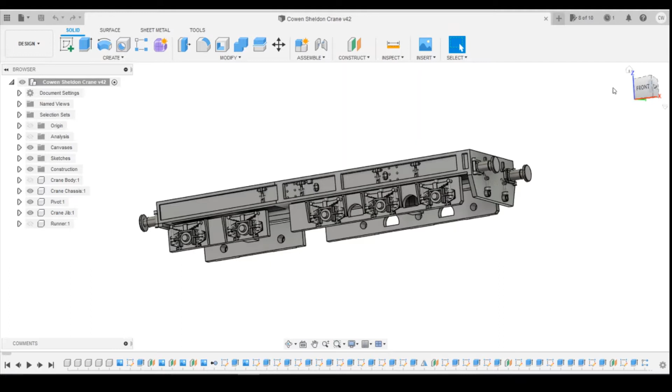Today's lesson I've got the test results from the print test that I produced yesterday. There's two versions. First was the version where we kept this as a rigid frame here, and then the second was printed as a bogey. Bonus points for anybody who spotted the issue with the bogey: the bogey pivot point is exactly where you'd want to have the centre axle.

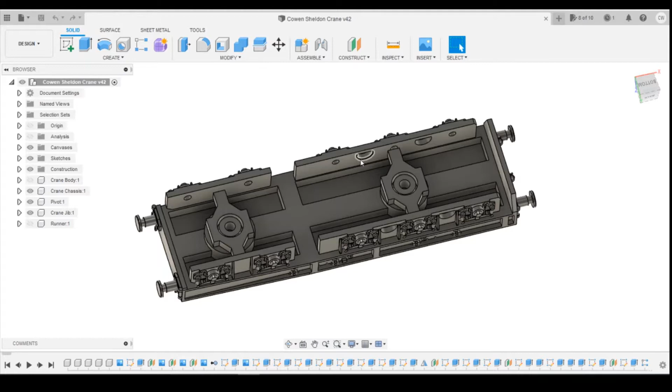Unfortunately, the issue with having that there is obviously you can't then have the axle, and you can't really offset the pivot point because then it just doesn't work. There's not really enough space in here between each of these to have the pivot point. So that was one massive disadvantage with that. And when I did only have the two axles in here to test it, it did run really well.

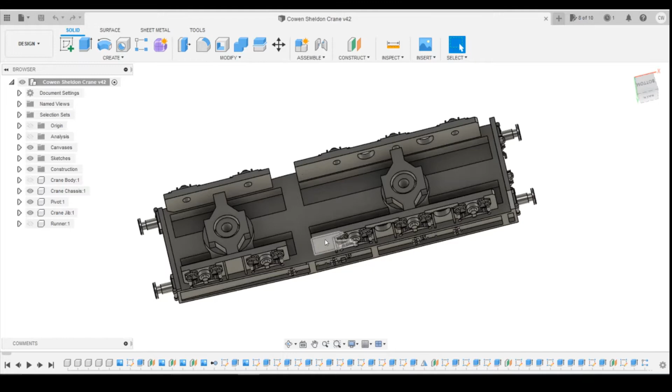The issue really is these ends particularly were a little bit too flexible and bent, so you could get around that by just putting some sort of bar across here to hold that steady. You could probably do the same at the other end to hold that end steady. And it did run well, but only with two axles. So if you wanted to go down the route of using that bogey, it does work.

The other option was we had it as the rigid frame, and with the rigid frame, without the bogey on, it would go around corners absolutely fine. And I ran that all the way down to 9-inch radius corners, and that worked absolutely fine. As soon as you put the bogey on, you wouldn't be able to negotiate the corners, and that was a 10-inch corner and a 9-inch corner and 10.5, I think it was. Above that, it was fine, just about, but it ran better on all of the radiuses that I've got on my layouts without the center axle.

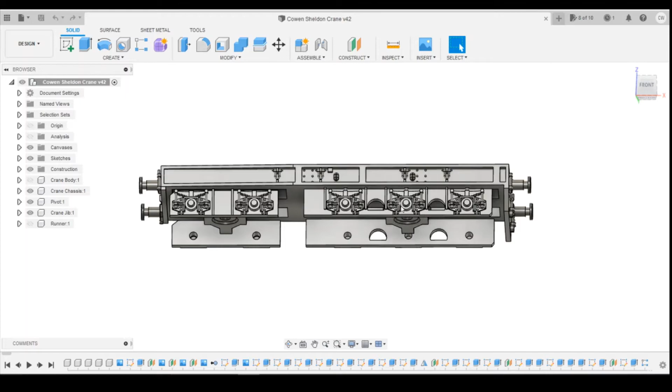Now I found that this ran absolutely fine, all the way down to 9-inch radius corners. There was enough play within the axles and the pivot point on the bogey that it worked absolutely fine. So I'm personally going to go down the route of pursuing it with the rigid frame so that it looks realistic, especially when it's negotiating point work on the layout. You're not going to see another bogey pivoting.

What I am going to do though is I'm going to draw a false wheel in this position here, just so there's something hanging down slightly. It's not going to touch the rail, but just hanging down enough that it looks like there is something there, and I could paint that black, and it will sort of mask the fact that there is that center axle missing. And personally that's the route I'm going to choose.

If you want to go down the bogey route, doing a similar sort of thing, that's your choice. But from the testing, I will say that I just could not get all three axles and the bogey to work on the tighter radius corners. So yeah, it's your choice how you'd want to pursue that from now.

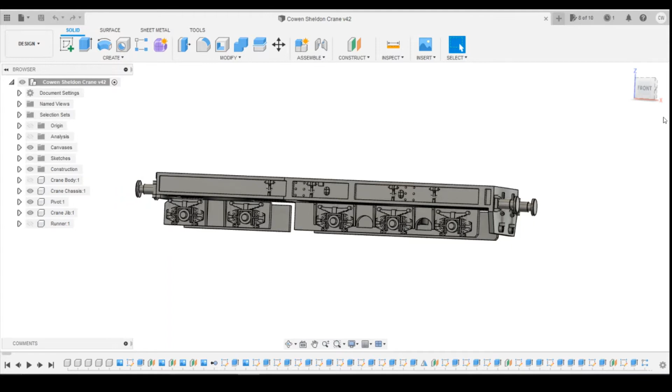Okay, so the other benefit of being able to have this as a rigid frame, and a disadvantage with the bogey, is going to be having the jacking points in here. If you have this front jacking point, you're not going to have enough room to pivot between the edges here and the front of the buffer beam. And you're going to have similar issues where it's going to be starting to clash with the bogey here when it starts to pivot.

So that's the reason why I'm going to pursue really going down this rigid frame. So in today's lesson, really what I'm going to do is I'm going to start by returning this back to the rigid frame setup, so we can then move forward from there, looking to add in on future lessons all that extra detail that I said about the jacking points underneath.

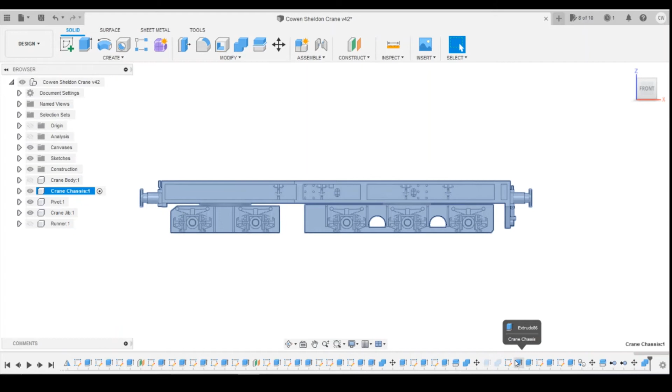Okay, so if we go to the chassis, we've got to make sure that we turn the radio button on, and then it changes all the history down here to match. And what we're going to do is just remove, not necessarily remove, because I'm not going to delete the work in case in future I want to return to this. So all I'm going to do is suppress all these features, and then we can then move forward back to how we were before.

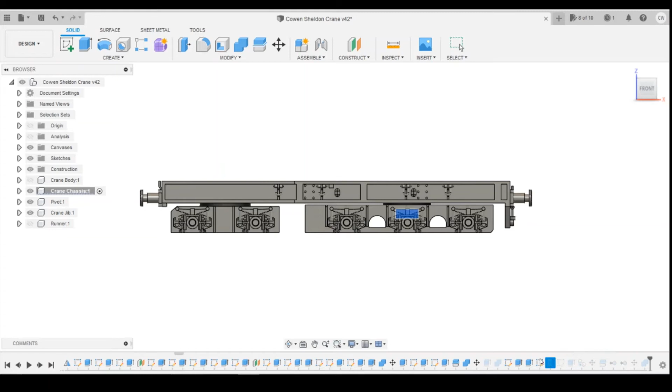And then in future, if you wanted to go back and do work using the bogie, you've got all these details here. It's not like they're lost. You can then just continue from that point. And then these two here, I'm going to unsuppress these, and that should return that back to the rigid frame setup that we had.

Where's that sketch from? Ah, yeah, unsuppress. Yeah, it is those two. Unsuppress those two. Okay, so there we are. We've got back to the rigid frame. It's only a really short lesson to give you the sort of results of the test and returning this back to how it was. So nothing too spectacular.

But hopefully that's now eliminated the need for you to worry about which option you're going to go down. I've given you the pros and cons of each, and the fact that I feel that this is going to be the better option for us to pursue going forwards. It's going to give us the cleaner results and the operation that we require.

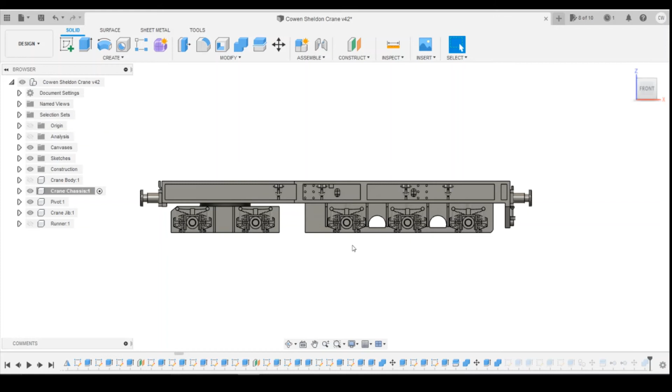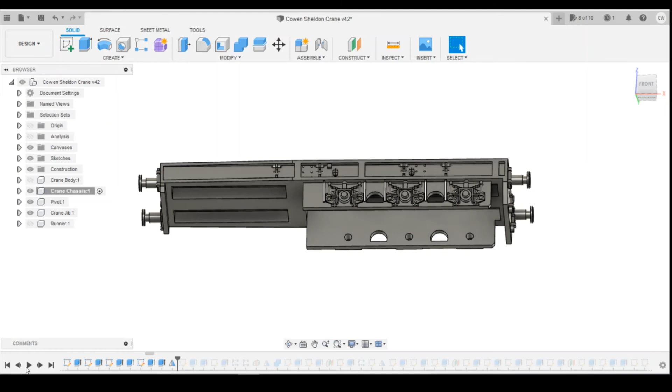As I did say, the one thing I was going to do was add that centre axle in here. So again, I'm going to just go back in the history to before the mirror object of the whole of the chassis. It's that one. So if I roll the history back to here, come back in, I'm going to rotate this round, and then I'm just going to draw on this back surface a wheel that's not going to come down too far.

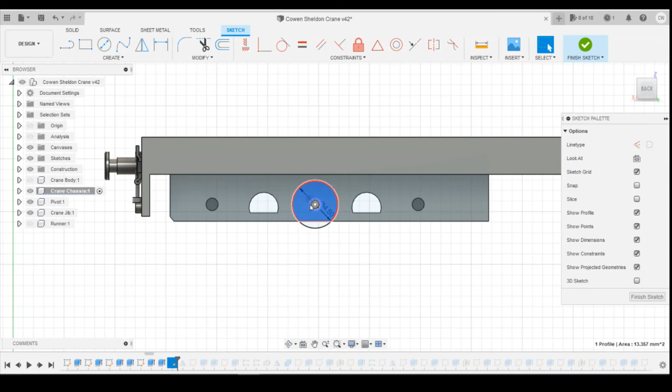So I'm going to use the centre point of the axle, and then you can see I'm just going to go, I don't know, maybe 4.5 millimeters. And if I'm using the 6.1 millimeter axle, you're going to see that you're going to have the hang down below, but it's not going to be touching the wheel. I'm just going to drag this inwards about a millimeter, give it a little bit of strength, tell it to be a join, and click on OK.

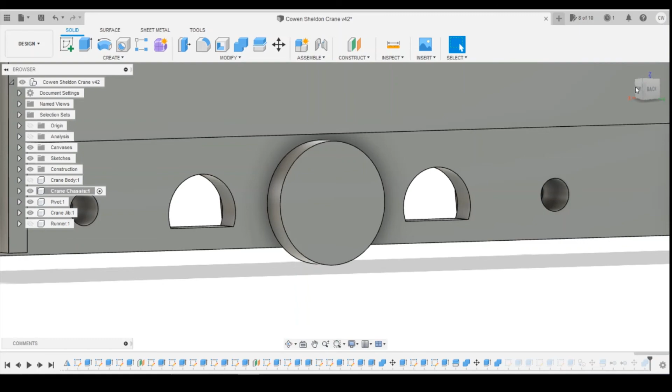And then we can jump the history back all the way to the very end. Now I'm using resin up here that I don't have to use, but I'm just using it to give it a little more strength. Okay, now if we look side on, you can see you've got that shape of a wheel there. If you paint that with a little bit of shadow, it will make that impression that there is actually a wheel in there, and just hide that glaring gap that we've got here.

So that's what I'm going to do with today's lesson. I hope you've enjoyed it. I hope you've understood where we've got to in the decision process that I've made and why I've chosen to go down this route.